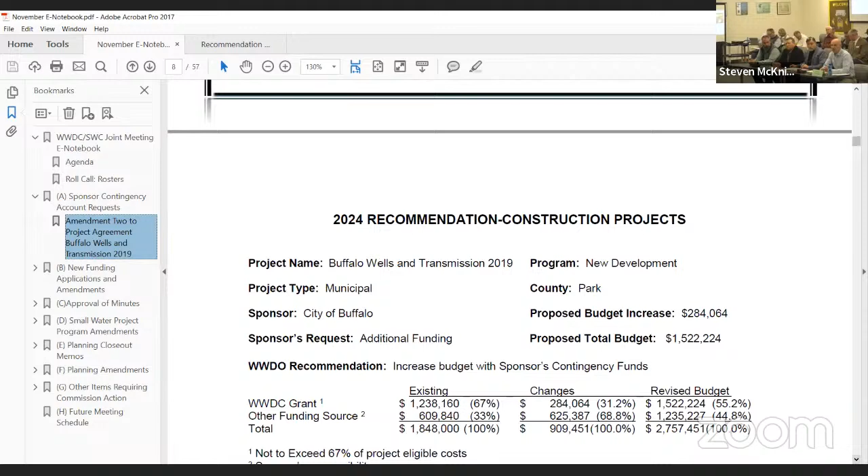I didn't anticipate there being any topics for Select Water Committee from my first contact with the LSO. So we decided we were going to shove everything into one day, because last year we had a short Wednesday and were hoping we could move some stuff to Thursday, but sponsors weren't there. So anyway, might be a little bit of a long day tomorrow, depends how many questions everybody has. And then Thursday, Select Water Committee is going to meet first thing in the morning.

And then I'll talk a little bit about the thought process we went through for the recommendations you're going to hear tomorrow, and then give you guys a couple of updates for the GID tunnels and the LaPrelle Dam situation and the reconstruction project as well. So with that, I will turn it over to Bill Brewer, and he'll go through the sponsor contingency account request.

Chairman, Commissioners, Bill Brewer, Deputy Director of Construction. We have a project for sponsors contingency. This is a 2019 project. I've gone through several times about these 2019, 2020 projects that are still coming up. Had quite a bit of issues with COVID inflation. Honestly, this project didn't come in that bad compared to some, but definitely over. Original project budget was a little over 1.8 million.

Bids came in a little high. We're actually looking now at about a 50% increase. Like I said, with these projects that had budgets before COVID, probably between 20 and 80%, most of them in that 40 to 60 range over.

This is a backup well system, so it's a good project to move forward. The town and engineer have been very good to work with as far as looking at cost savings options, adjusting things, so we appreciate that. But basically, this is what the sponsor is requesting. This project has already been awarded. They are going to cover the cost one way or the other out of their own reserves. However, they would appreciate if we could help them with some of that so they don't empty out the reserves to get this project done.

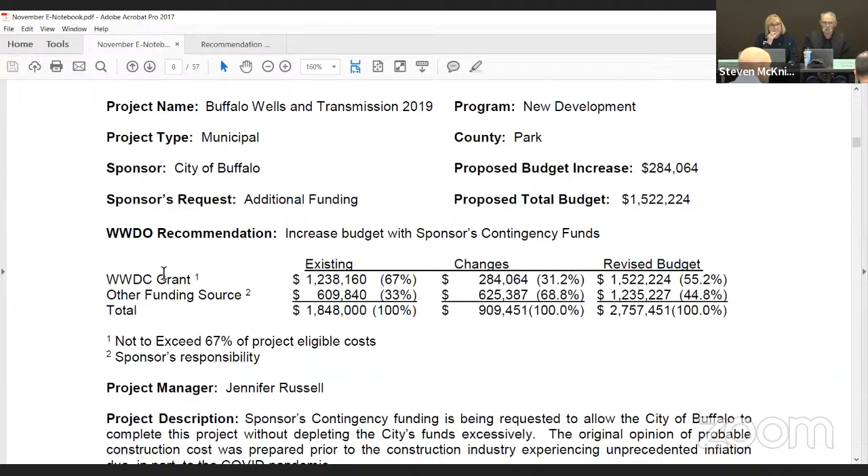Chairman, Commissioner, so for the city of Buffalo, when we did the engineer's estimate for this second construction package, it was estimated there might be up to a $1.2 million shortfall. So the city of Buffalo authorized out of their contingency funds, those funds available to complete this project so it gets finished regardless. The funds would not revert back to the Water Development Commission, but would make their contingency funds a little more whole than what they are now, because the funds are obligated to this project.

Thank you. Okay, there's no other questions. If there's anything else, I guess there's no action today. It'll be tomorrow that we take the action. So thank you. Thank you.

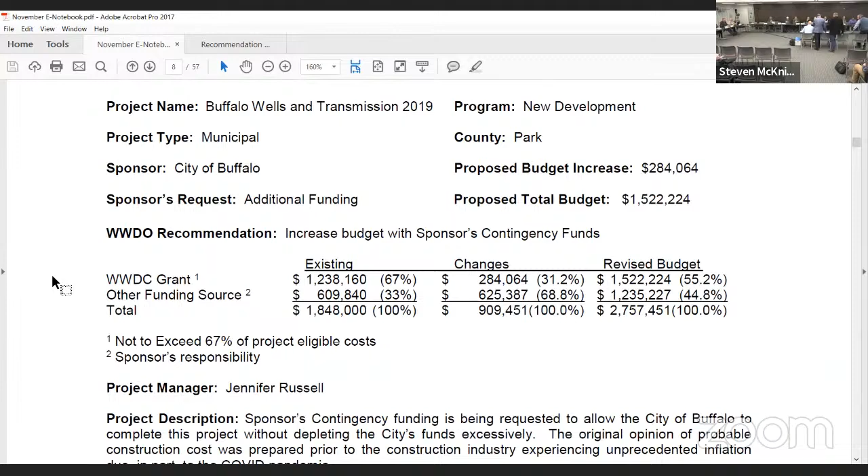Okay, we'll go back to you, Director Mead, unless you want to add something.

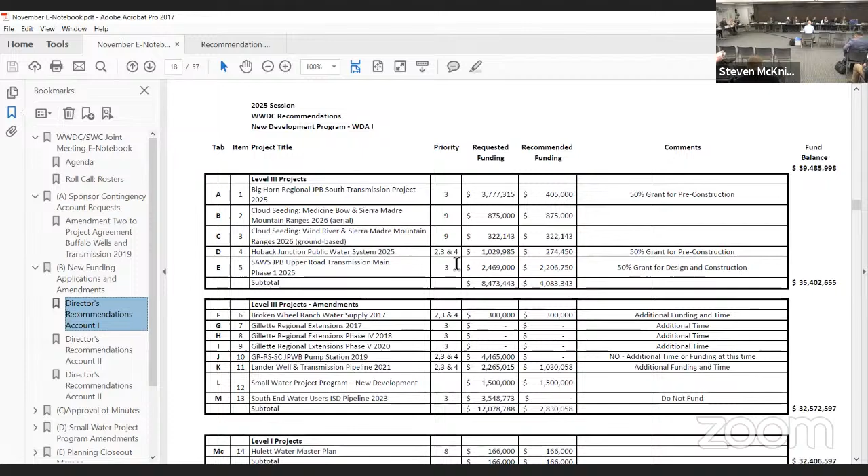Okay, so moving on to the next item, new funding applications and amendments. Again, just kind of wanting to give you guys the thought process we went through. I would direct you towards your regular e-notebook, not the recommendations e-notebook, but tab B as in boy under the regular e-notebook. There you'll see basically the spreadsheets and recommendations and dollar totals and funding balance for different accounts 1, 2, and 3. I'll be talking through those a little bit, but it'd be a good reference as I talk through this. So I'll give you just a minute to find that.

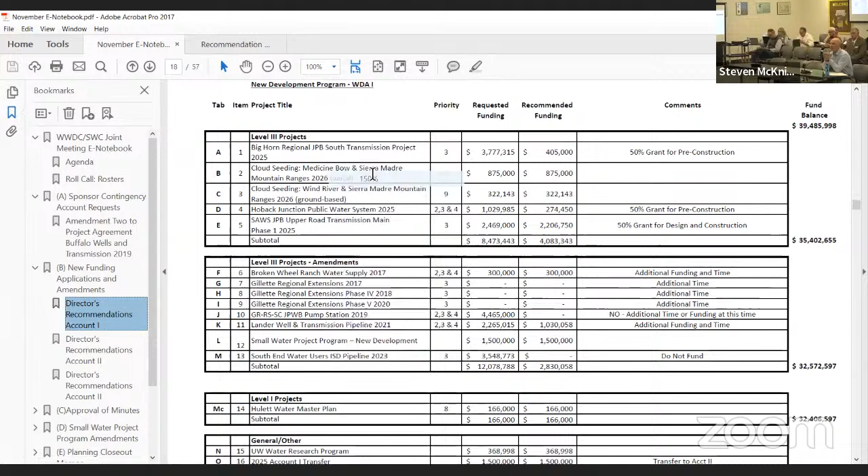Everyone's set? Okay, go ahead. Give it one minute. Okay.

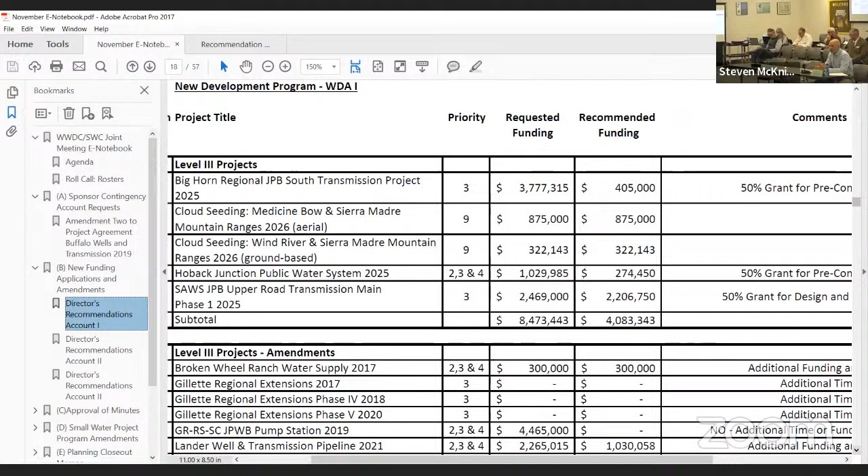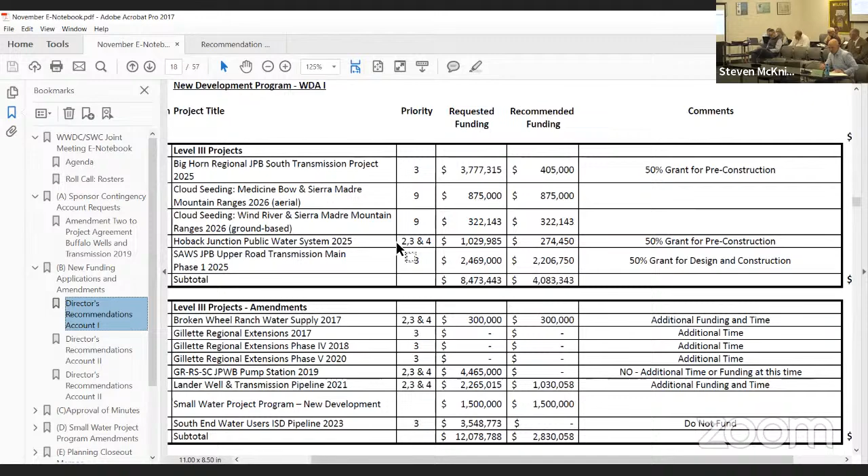Okay, go ahead. All right, so I'm going to talk about account one and account two together simultaneously, because as you recall in the past, we've transferred money from account one to account two to kind of budget or balance things as we have more demands in one account or the other. So when you look at account one balance available to spend, that's up in the upper right-hand corner of each one of these spreadsheets. So the first spreadsheet's account one, the second spreadsheet's account two, and so on for account three. So the amount of available funding this year is roughly $56 to $57 million.

And that's broken up into roughly $39.5 million in account one and $17 million in account two. As a comparison to last year, at the end of our recommendations for the 2024 session, we had roughly a little less than $13 million in account one and about $5.6 million in account two. That was kind of what we typically do: we take our biennium available funds and try to spend half one year and leave half for the next year. So that half we had left over was about $12.8 and $5.6 million. So then what happened, these balances are much bigger.

So we talked in March, I believe, from what came out of the legislative session. One of the things was a one-time refund for the Board of Control funding coming out of our account one. Board of Control is all the hydrographers and folks regulating head gates throughout the state during the irrigation season and others. That biennium refund for 2 years was about $17 million.

The other thing was, if you recall, we had ARPA replacement. What came out of the legislative session was that the governor was given authority to redistribute some of the ARPA funds that weren't used, water being one of the emphases put on by the legislature on where to put that money. So we worked with the governor's office, came up with 8 projects that we felt would meet the time requirements of ARPA and getting money obligated and spent by those certain dates with federal requirements. Those 8 projects equated to about another $23.5 million, where they replaced water development funds that had been given or granted to our sponsors. So now instead of the sponsors having water development funds, they have ARPA money. Our accounts were more or less replenished for $23.5 million.

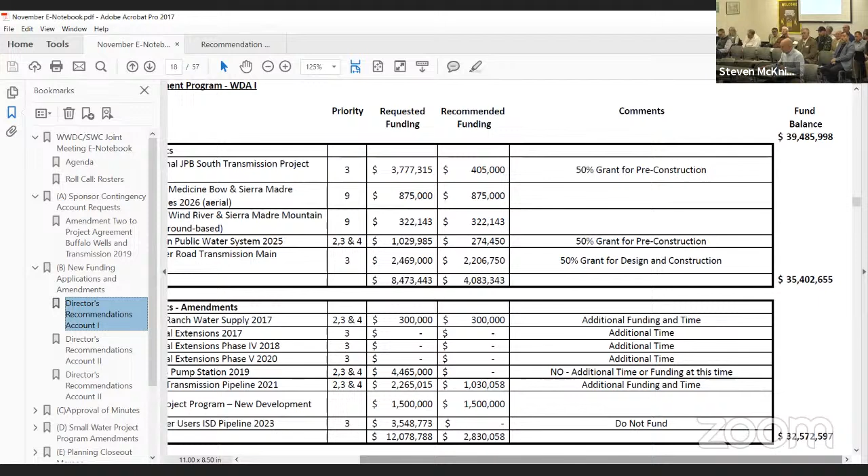For applications in account one, we got 19 new applications - that was between account one and account two. We have 10 amendments that came in by September 1st for construction projects. We already knew what our planning studies were going to look like since we took applications back in March and went through our May meeting to select those. Adding up the different construction projects, we had about $47.5 million worth of new applications for new construction projects and about $10.5 million of amendments to existing construction projects.

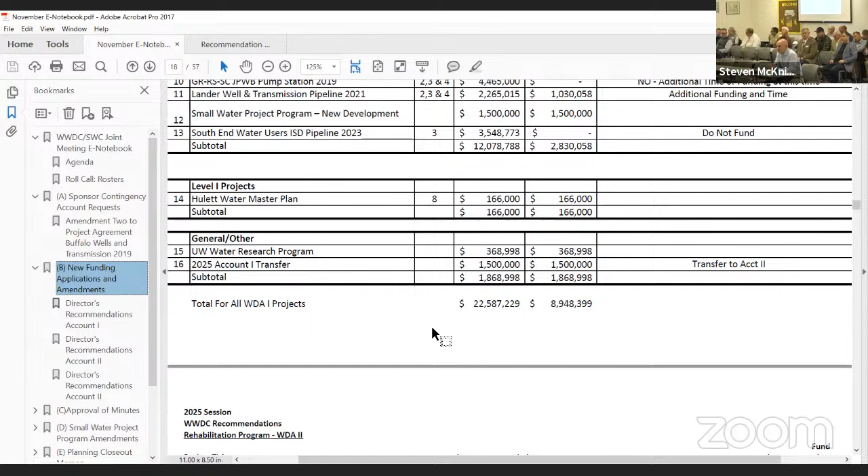As a comparison, last year we had roughly $46 million worth of requests between new and amendments. So again, more than we saw last year.

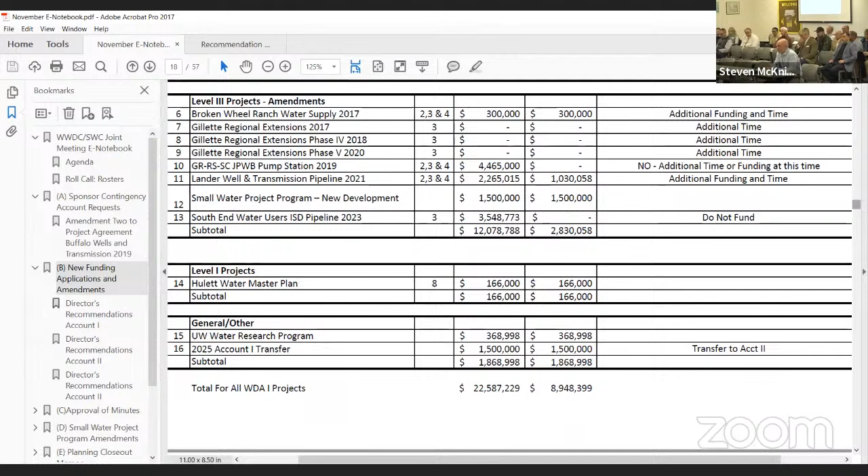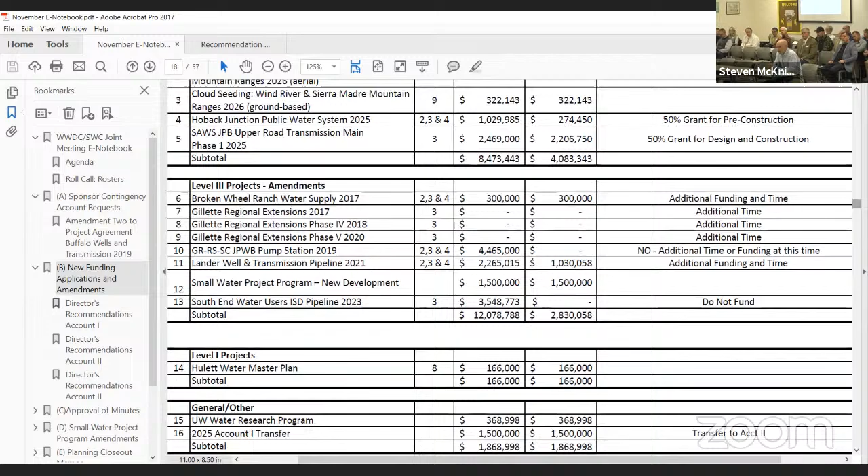The way we look through that is, one, is the project even eligible for our program? One project this year you'll be seeing tomorrow - West Afton, Neeld String - they were two irrigation groups working together, got a master plan done, hoping they could put together a district. I think Neeld String kind of fell out of that conversation - we'll hear more about that tomorrow. They only came up with 933 acres, if I remember right, and our criteria says you have to have a minimum of 1,000 acres to be eligible for the water development program. That's one thing we considered, and that'll be something the commission and the Select Water Committee will have to consider tomorrow for that particular sponsor.

The other eligibility component is, a lot of times when we get projects in, they're a much larger project that might include water treatment or water distribution lines for municipal type projects, where our program really just funds the water source and transmission lines, not necessarily distribution or water treatment plants and things like that.

So we have to ferret out what portions of a project are actually eligible for our program and which ones aren't, and then we tailor our recommendations accordingly.

Another thing we thought about is this is one-time funding. There were several sponsors that asked for multiple projects or multiple projects within one application. We want to make sure we're distributing that funding as evenly as we can, or giving sponsors the ability to leverage it if they can. Just because you happen to apply for several projects in one year, we didn't think it was necessarily fair to give that funding to just one sponsor. We should hold some over for next year, and that was part of our thought process as well.

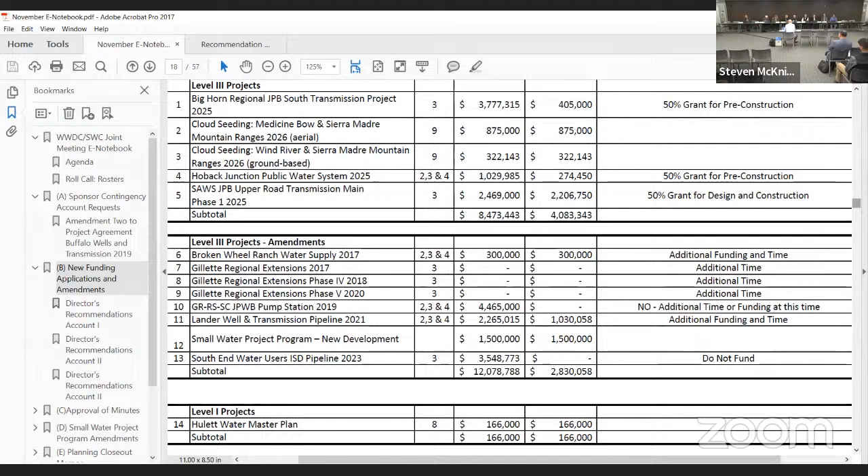Madam Chair, Vice Chair, Director Mead - I don't know if it's appropriate or not. Is this the place to discuss individual projects, or should we wait till tomorrow? I'd prefer to wait till tomorrow since the sponsors are here to address questions, unless you've got something fairly simple. Well, this wouldn't be a question for the sponsor, it'd be more of a question for you. Okay, and maybe for the group.

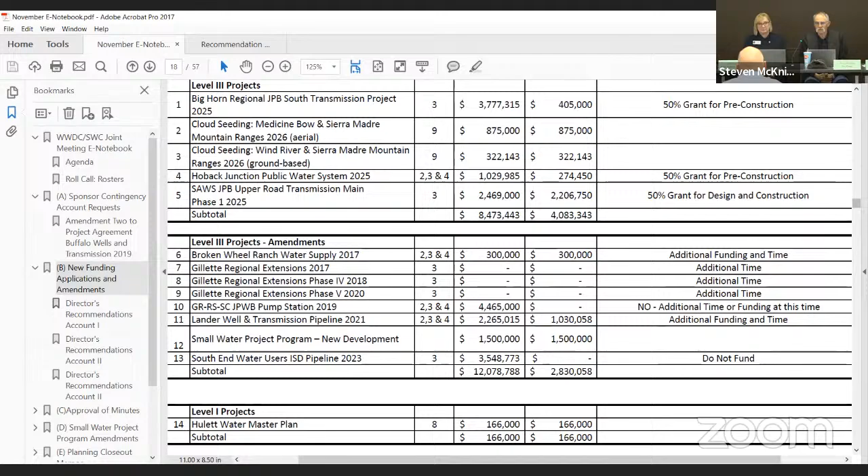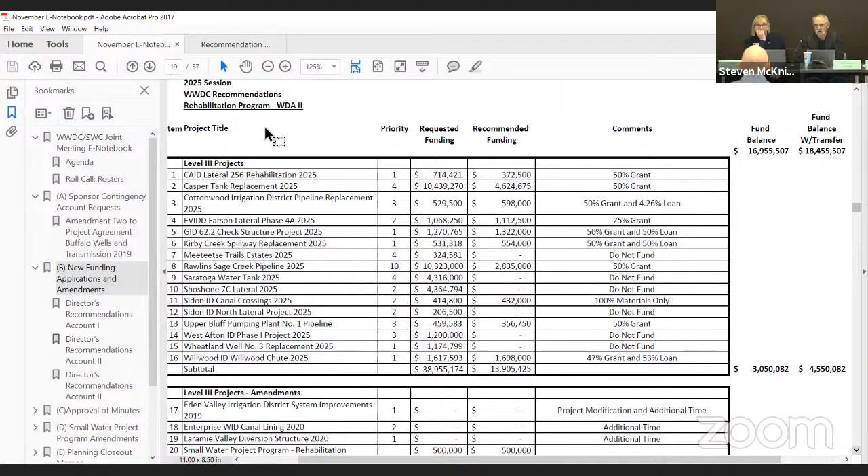I became aware of this West Afton Neil String acreage limitation - a 1,000-acre limitation, I believe. I did a little research into that and found the language on it. The question I have is, is that part of the working criteria? How concrete is that? Has there ever been an opportunity for a variance to anything like that?

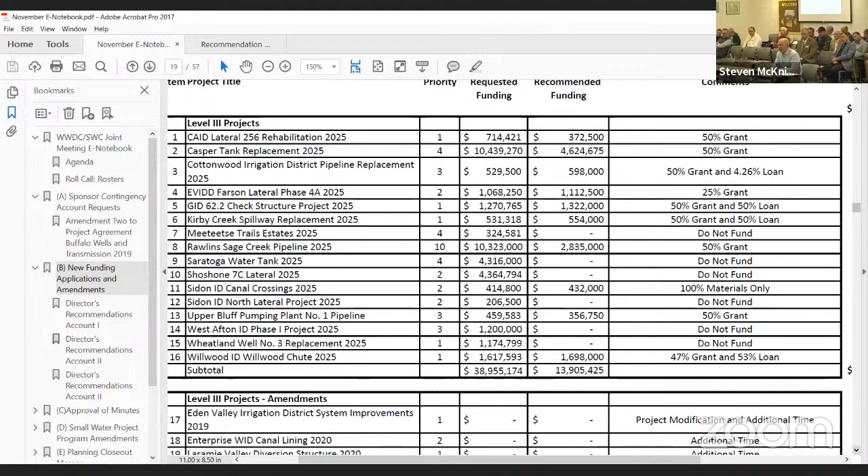So it's in our operating criteria. Criteria are not rules - they're there to help guide our program. There can be exceptions to criteria, and that's up to the commission to consider. I don't recall if we've ever had another sponsor come in under 1,000. At one point, I think it was 2,000 acres under a previous commission, probably a decade ago, and they decided to change it to 1,000. I don't know if there was any real firm thought behind how they came up with 1,000, but it was changed at one point in time. I'd say there are always exceptions to the rules, but we also have to consider the funding we have and all that.

I guess that's what I can respond with on that question. Okay, thank you Director - but you have the flexibility to do what you want. Okay, great, thanks Director. And then we'll go ahead and let you continue.

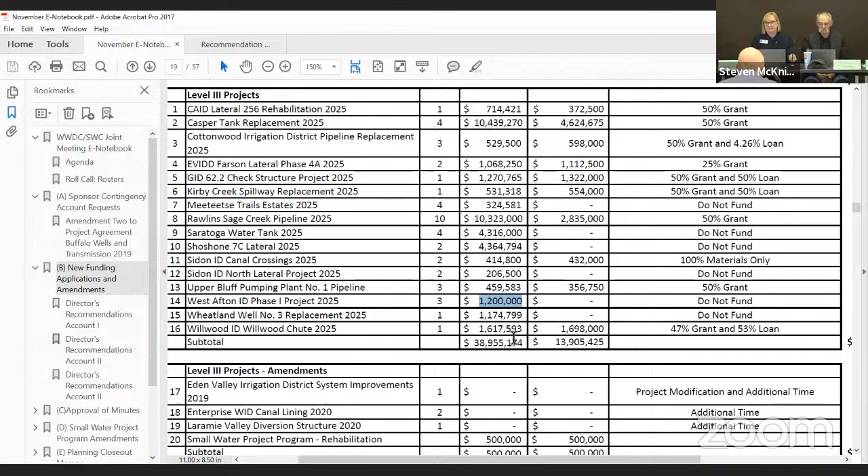The only other thing I'd mention, a little separate from what we were just talking about - normally when we finish planning studies, we do project closeouts showing how much money was spent, a synopsis of the study, and when the final presentation was. We had a number of studies: Casper Alcova Irrigation District Master Plan, Goshen Irrigation District Master Plan, Sidon Irrigation District Master Plan, and the Willwood Rehab Level 2 study. Those are just getting wrapped up - we're still waiting for final deliverables and final invoices. It'll be slightly out of order because they've already applied for level 3 funding, and you'll hear those tomorrow.

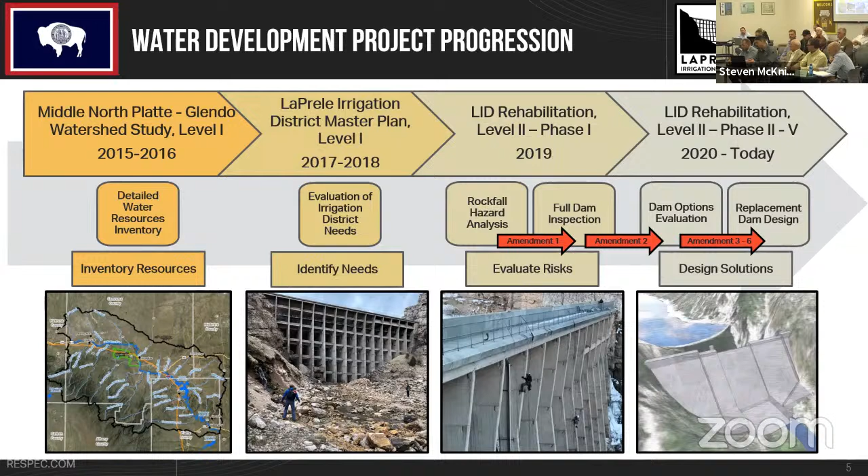Then into 2023, we amended the contract again to move towards 30% design. That's when we tapped into the federal money in May of 23. From May 23 through 24, there was additional geotechnical analysis, additional helicopter drilling, and that leads to a little more detail on what's happened in the last year.

Completing that 30% design included updating the spillway design, structural analysis and modeling, updating the construction cost estimate and basis of design report. The cost estimate at 30%, to give the range, is anywhere from 116 million to 178 million, with error bars around the estimate given where we're at on design.

We've also delivered, or are finalizing, the 2023 geologic data report, going through all the data collected from 2020 through 2023, including the fault and fold evaluation. We've been moving forward with NEPA and environmental surveys, and that's coming along. We're targeting a finding of no significant impact in the first half of next year to keep things moving.

We've been shifting from what has been a level 2 project into a level 3 project, with changes to those contracts and planning to get the CMAR integrated. We've just finalized the contracting for design, got signatures this morning actually. But really looking at the last 2 to 3 months, what we've been focused on has been the existing dam, so we'll jump into that.

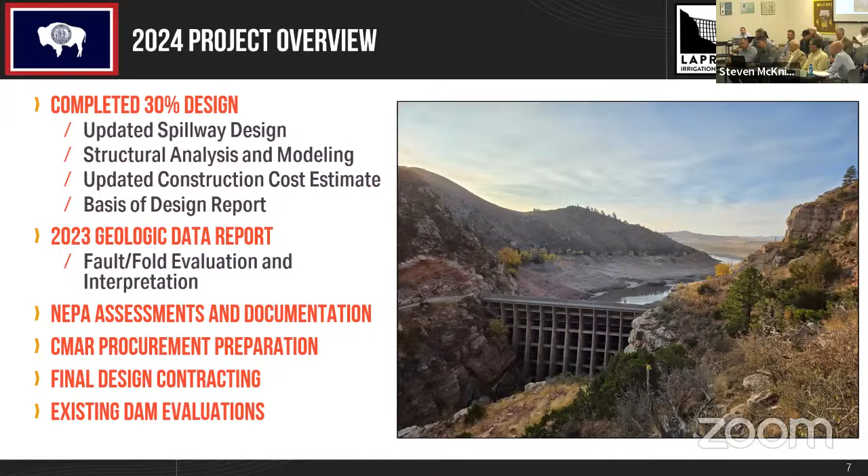Thank you, Madam Chair. I'm going to talk about what has been all consuming for us on this project for about the last 3 months, and is the topic of the day. I'll give a brief history going back to the 2022 inspections and the findings of that, to set the table for where we were at the beginning of the summer, so we can talk through where we're at today and what led to today.

As Pete just alluded to, the very first inspection was a very limited inspection of the three buttresses back in September of 2019. That's where we found the large crack on buttress 17, about a 10-foot vertical crack. That's where we put everything on hold for the feasibility study as it sat at that point. That led to the first full inspection with the rope access team and a drone survey of every surface of the dam.

The first full inspection was in December of 2019. Then we did a follow-up inspection as part of the state engineer's office 5-year return interval on inspections of this dam, so we repeated that process in 2022. That's what I'm showing on the screen right now.

This shows all the cracks found in each of those inspections in 2022, looking at the side of the buttresses. You have a slab and 17 buttresses, and this shows all the cracks on one figure, not any one buttress, but all of them composited together. Going back to that first 2019 inspection, we were hoping it was an isolated issue with just buttress 17, so we could focus our rehabilitation there. But what you see in the 2022 figure is systematic shear cracking throughout the dam. There are numerous issues with the dam.

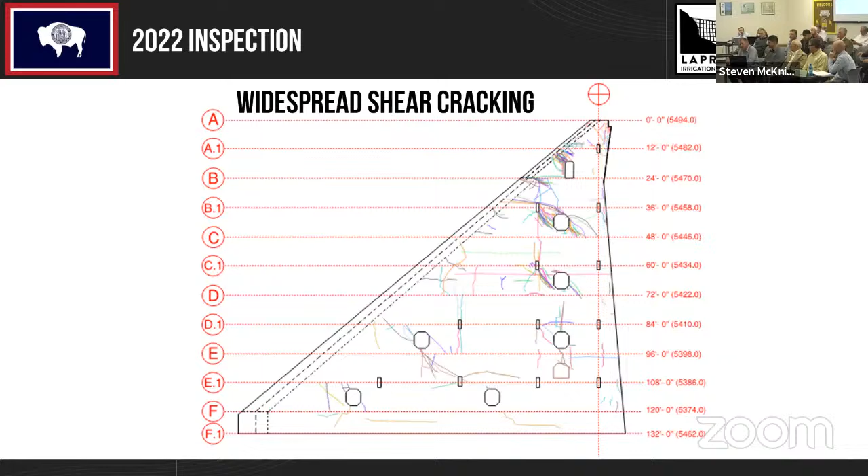Generally speaking, the outcome of that 2022 inspection, and really all the work up to that point, was that the dam has reached the end of its useful life. It's in very poor condition.

Also in 2022, we did a risk analysis. This was a process paid for using FEMA funds, led through the state engineer's office. It's a whole presentation in of itself, so I promise I will not cover it fully.

Just two slides. The outcome of this is we looked at a lot of different failure modes in this risk analysis, plotted multiple failure modes. Anything above those dotted lines on the screen is unacceptable, above the tolerable risk thresholds. The total risk is plotted there in the white box.

The outcome of this is that the total risk associated with this dam is above tolerable levels. I should point out that this assessment only evaluates the potential for loss of life. It does not incorporate infrastructure into the allowable or tolerable risks. A catastrophic failure of this dam would have incredible impacts to downstream infrastructure besides the potential loss of life, including potentially taking out the two interstate bridges.

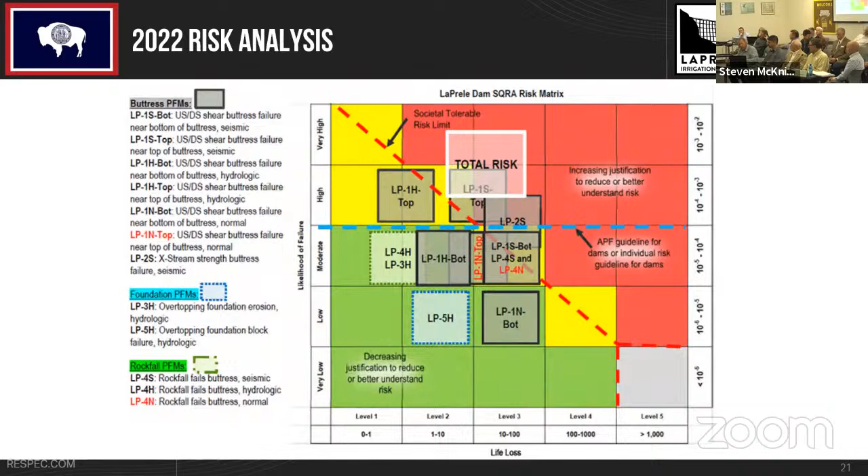So really all of this work led to where we were at the beginning of the summer. It held true: the overall condition of the dam is poor. That risk assessment was focused on the risk at the restricted level, not at full pool at 54-90. And even at 54-75 with the restriction in place, the risk associated with this structure exceeded the tolerable risk limits. Interim risk reduction measures would be justified to help mitigate this risk.

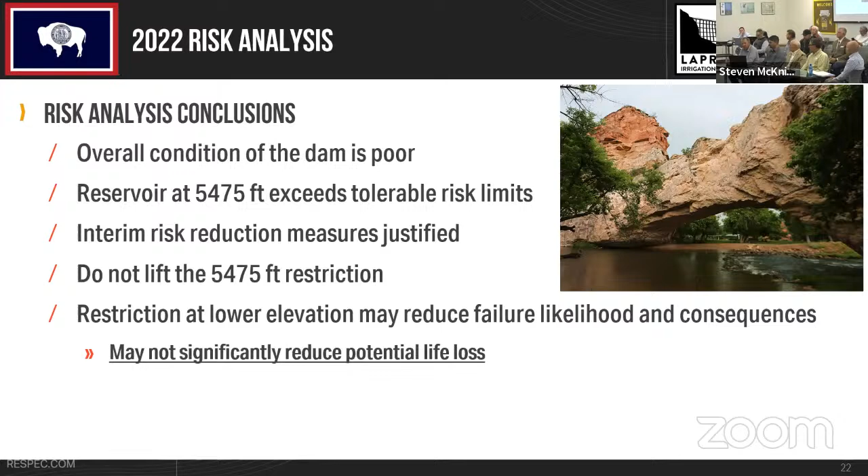It reinforced the idea that you could not remove this risk; the restricted level of 54-75 needed to stay in place at a minimum. Ultimately, while restricting to lower elevations may reduce the overall likelihood and consequence of the dam failing, it doesn't really reduce the total risk below those dotted lines, because the hydrologic risk—the chance of filling up in any given year—is high enough that you're not significantly reducing the potential loss of life at lower level restrictions, and it would still be above the tolerable risk limits.

So that's between what Pete talked about and what I talked about. That took us all the way to the beginning of 2024, and then things started to change. Kick it back to Pete.

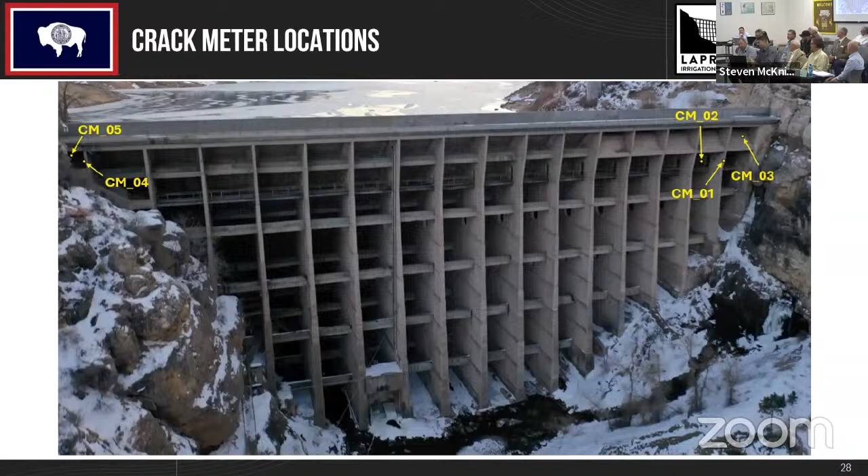All right, on the crack meter location slide. Yep. Thanks, Corey.

The thorough inspection we did in 2019—at that time we knew we had cracks and wanted to install monitoring on them. The irrigation district actually paid to have these installed and perform monitoring. Shown on the screen is the location of the 5 crack meters that were installed, all higher up on the dam, where we had seen the most apparent cracks we were concerned about at that time.

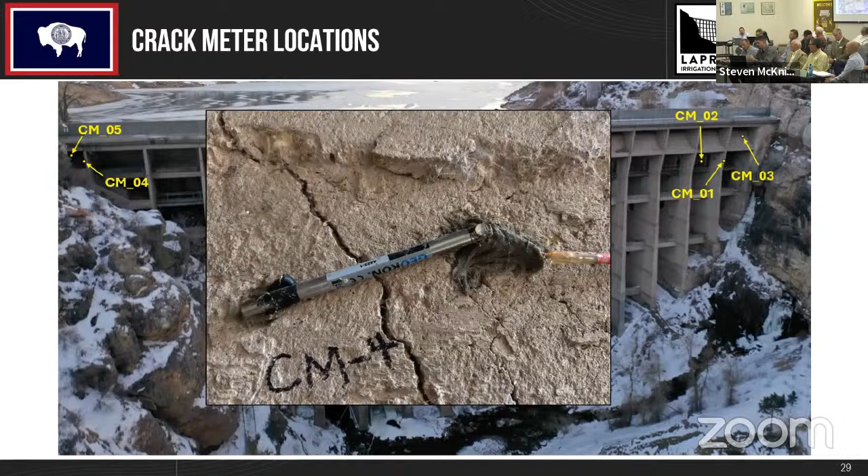We have data from that logger sent out by cell, and we get it nearly real time—I think maybe every 15 minutes on the update.

Ultimately, by the end of 2021, having a couple seasons under our belt, we didn't see any clear correlation with water level. But given that we had all the crack meters up high on the dam, we thought it'd be good to put some lower on the dam, and just to continue monitoring for any change in behavior.

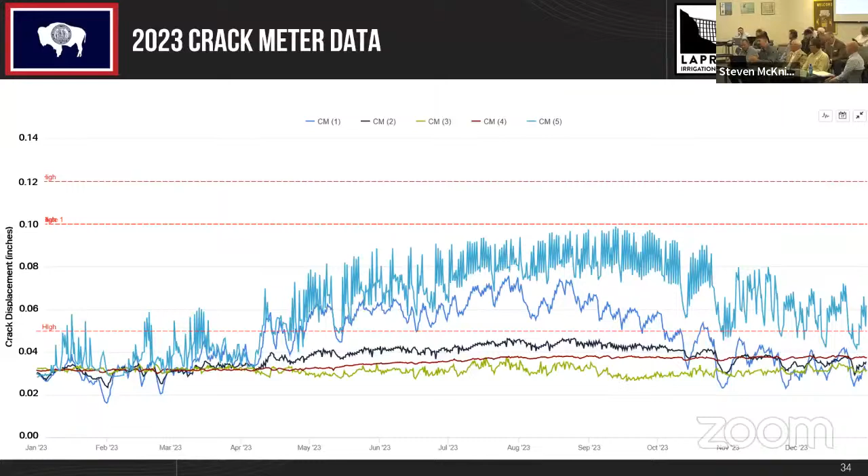At the time, the irrigation district decided not to extend the contract beyond 2021, since this was another cost for them. But I did make the decision to keep them out there collecting data because the situation seemed important enough. So just to cover these briefly, this is showing data through 2022, 2023. We're checking in occasionally, looking for anything unusual, and we set thresholds around what we had seen as normal crack movement, so that if we got any crack outside of that, we'd get an alert.

What led us to where we are today: in early August, the 1st, 2nd, and 3rd, we received alerts that crack meter 5, which had a lot of fluctuation throughout our monitoring, had exceeded the threshold we'd set. So we checked it out. It hadn't exceeded by much. We speculated that as hot as it was at the time, and the way this one correlates strongly with temperature, that may have driven it.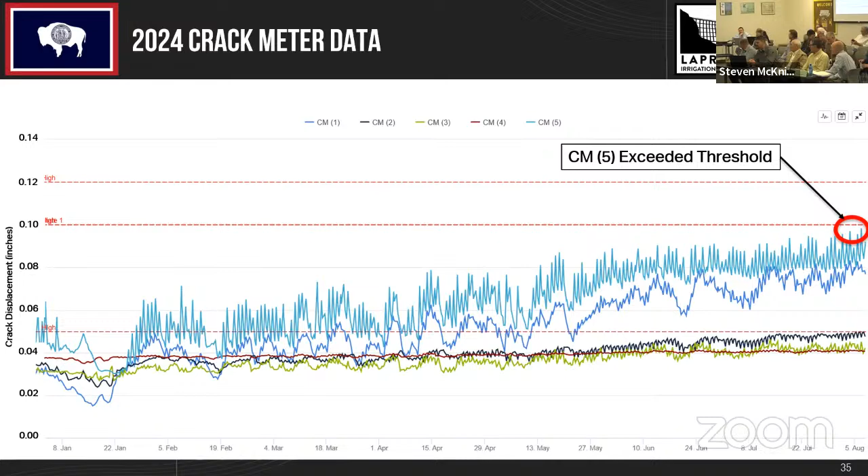Ultimately, we pulled in crack meter 5 to look closer at what we have on the screen. There's all 5 years of monitoring data - displacement up above, temperature down below. We really didn't see any significant changes in behavior, but if anything, maybe a slight trend up in the displacement over those 5 years. But really only talking about 1/100th of an inch. For scale, if you're familiar with a mechanical pencil, that lead is 2/100ths of an inch, so it's a very small change in displacement.

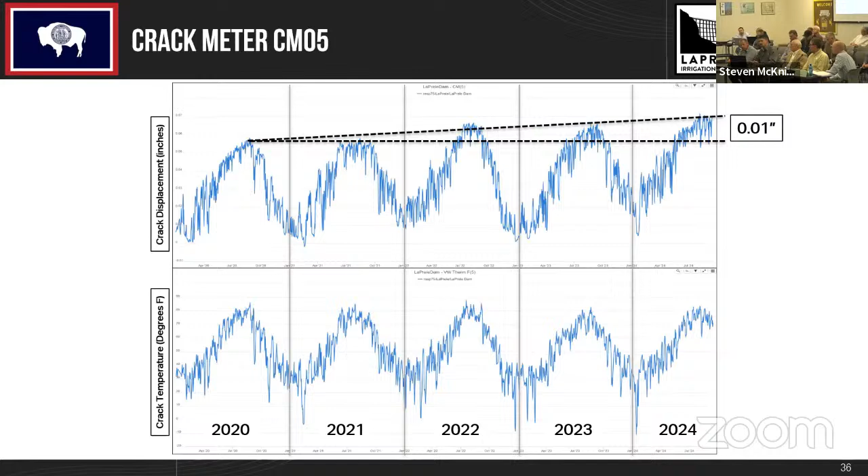We concluded that this is noteworthy. We didn't think it was concerning at the time. But this led us to take a look at the other crack meters to see if anything else unusual was going on. Crack meter 3 is one that over the 5 years really did not have much significant change in displacement compared to, say, crack meter 5.

But looking at it closely, what I have there with the dashed red line is really what we would have expected - typical behavior. As we look back, we noticed that starting in May 2023, it deviated from that expected behavior. But again, even into 2024, as that ramped up, still talking only a displacement of 1/100th of an inch in that change.

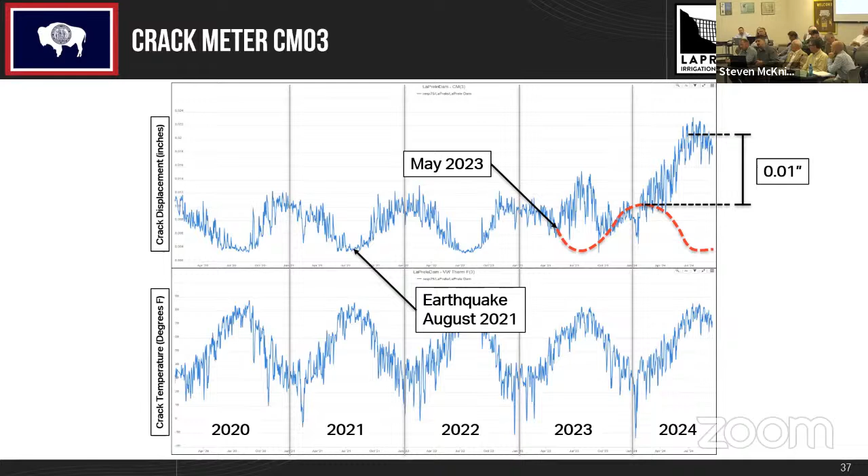Also on our minds was, okay, we're seeing these changes - does this relate at all to the earthquake? If folks remember, we had the earthquake right before the commission tour in 2021, and that really didn't seem to have anything to do with it.

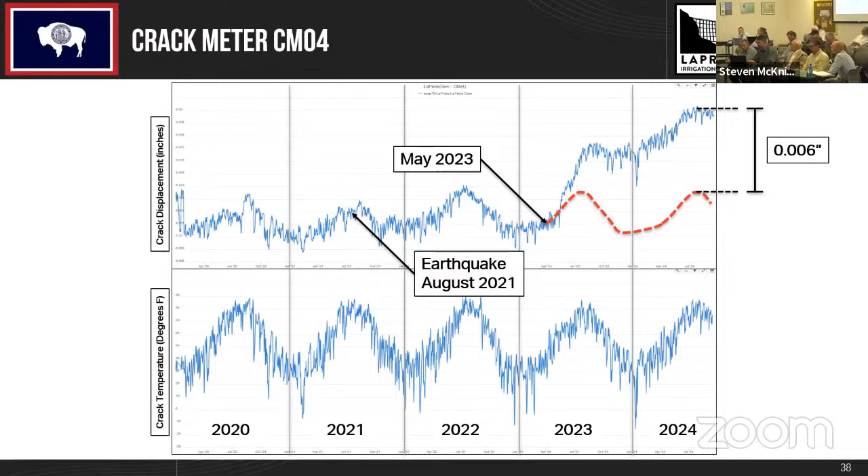Also looking at crack meter 4, we basically saw the same kind of change in behavior about the same time, but even less of a change in displacement - 6/1000ths of an inch. So evaluating, well, we've got these 2 crack meters at either end of the dam, just showing where those are at up there.

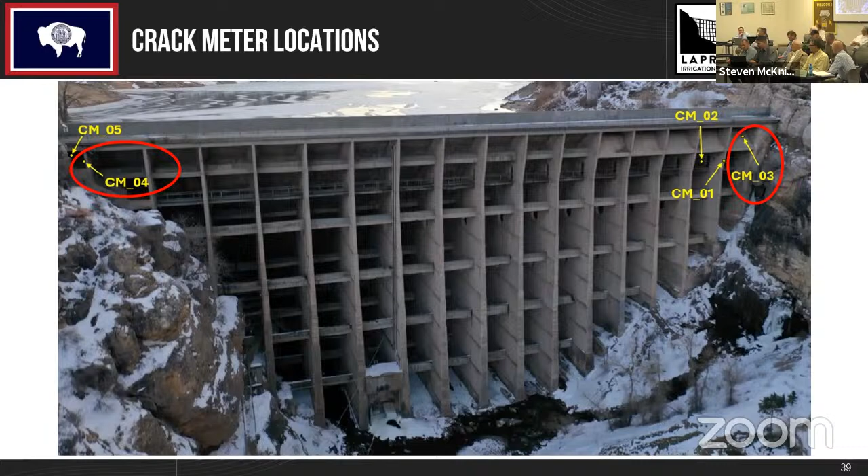It really brought forth these questions. First, we are seeing this change - what's the status of the reservoir? At that time, the irrigation district had finished irrigating, had turned off the reservoir August 6th, I believe, and the reservoir elevation was low. So that was good, and the conclusion was, okay, the reservoir's low, this isn't necessarily urgent.

But the next questions are: have these crack meters come loose? Do we really trust the data? We needed to look into that. But then with the change on the two crack meters, both starting in May of 2023, was there some significant event that may have caused that? And if so, seeing this on both ends of the dam, is there something going on in the middle of the dam?

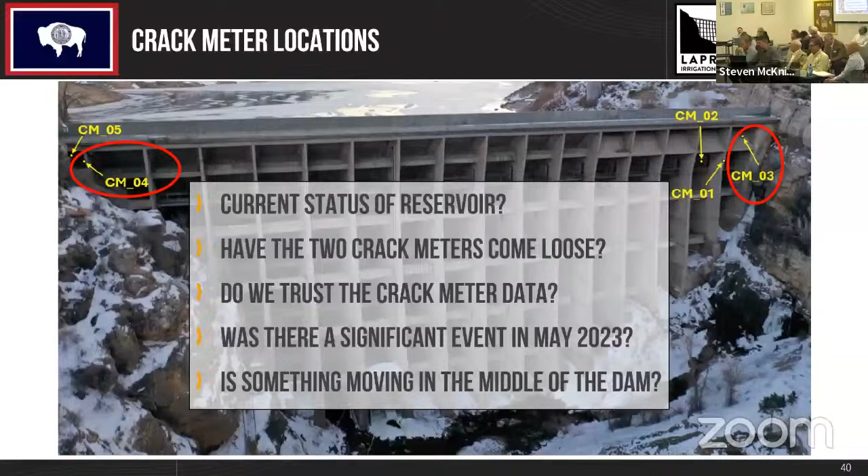So, I already touched on - the reservoir elevation was low. We got out there September 17th to inspect the crack meters and found them solid, well bonded, and determined that the system was fully functional. So that answered that question.

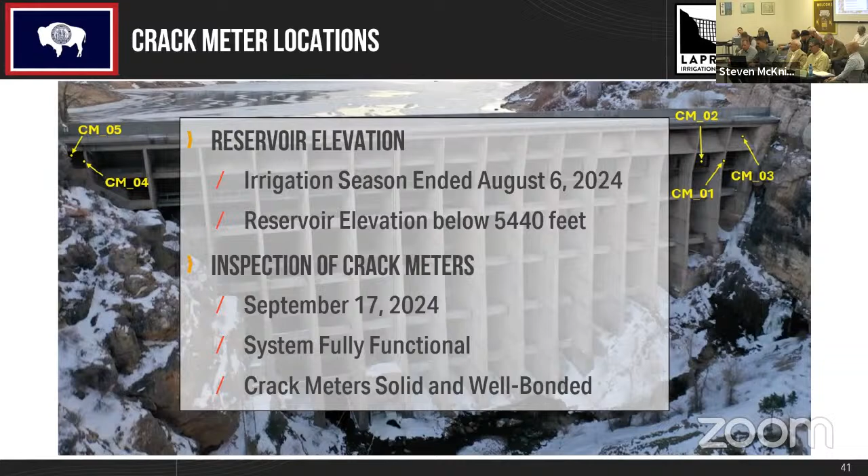But then looking at what was going on in May of 2023, the reservoir was experiencing pretty significant inflow that spring. The district was fighting that, taking turns around the clock watching what was going on with the dam. As the reservoir elevation continued to climb, the district had to open the main outlets more and more, and eventually they got to where they were wide open.

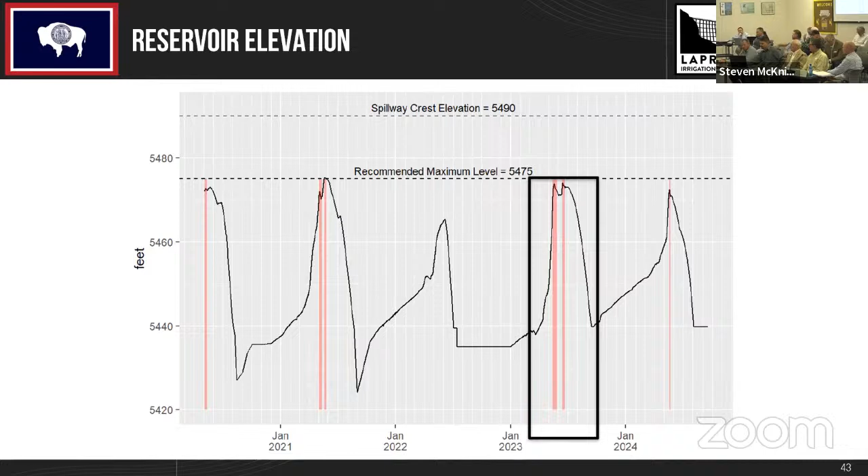As we zoom out, looking at all the crack meters over all 5 years and how things related to that May 2023 event, it's fairly apparent with both crack meter 3 and crack meter 4 that's when we started to see that change in behavior.

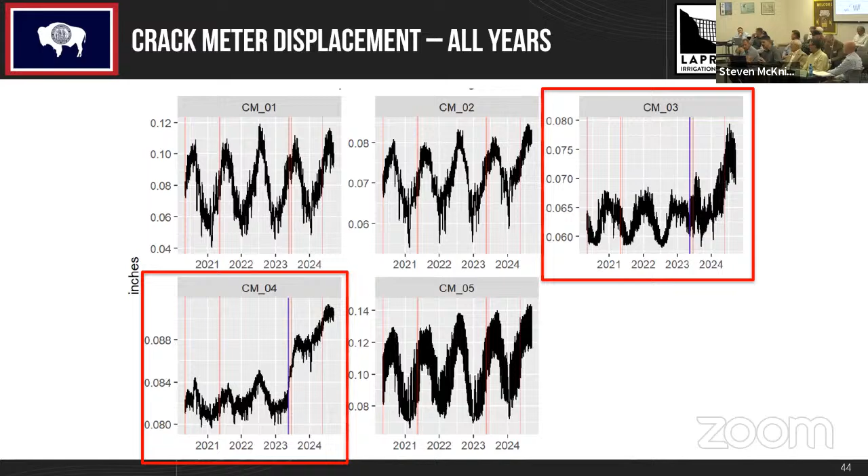Digging in a little deeper with the data to make sure we were confident in what we were seeing, we evaluated one data point to the next, tracking the difference over these 5 years. Crack meter 3 is the most apparent - the data was relatively quiet up to that moment in May 2023, and then it started to vary significantly.

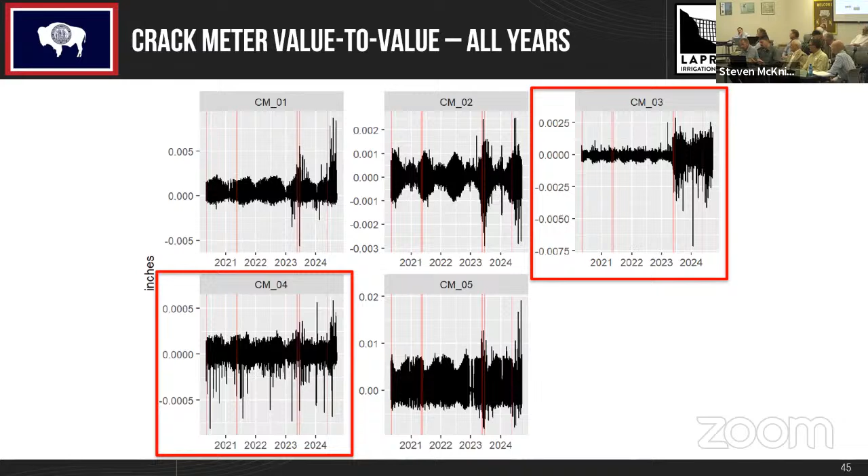We actually see that change in behavior with all the crack meters starting at that time. This is just zooming in on crack meter 3 to show, narrowing in on when the discharge was cranked up, that clear change in behavior.

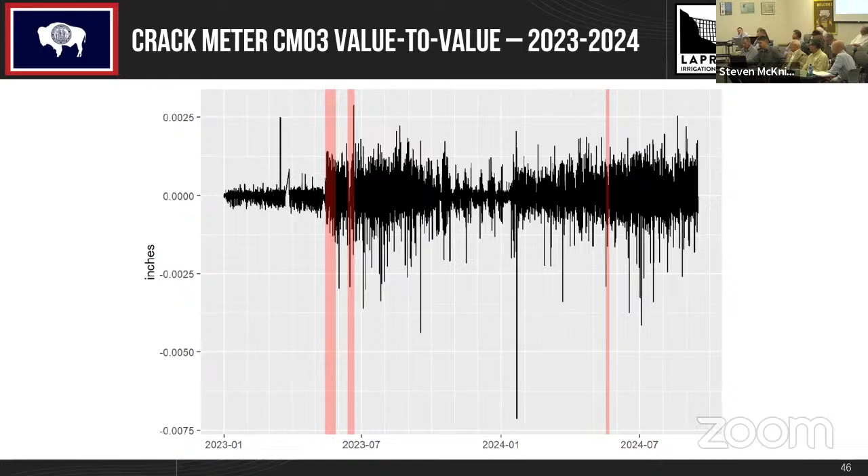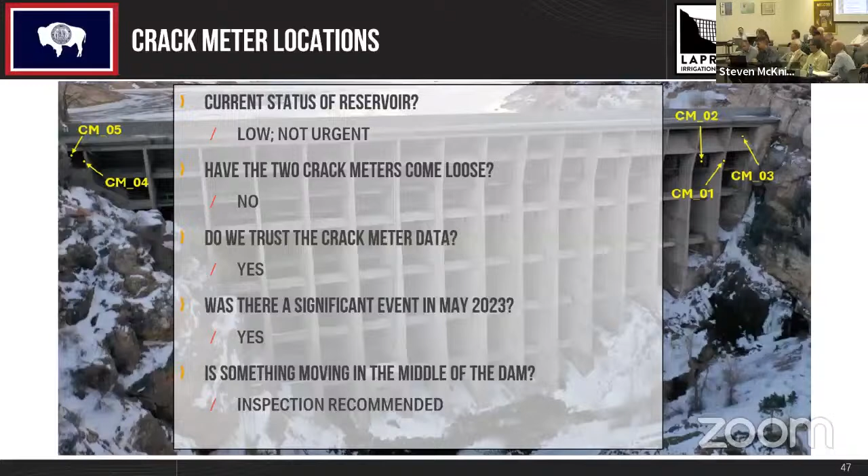So back to the questions. With the reservoir at that time, early August and now into September, the reservoir is low. We didn't think this was urgent, but the crack meters had not come loose. We trust the data. We identified there was a significant event in May of 2023, but the last question being: is there something moving in the middle of the dam? We recommended an inspection and worked with the HDR structural team to set that up.

Okay, so I'm going to talk a little bit about the inspection. Just to recap, we have movement in the top 2 corners of the dam. We don't know what was happening in the middle of the dam at this time, so we're not really seeing the cause of the movement per se - what we're seeing is a symptom, and we don't know what's happening in the middle. So through multiple conversations with the state engineer's office, LID and others, the decision was made to move forward with a full inspection.

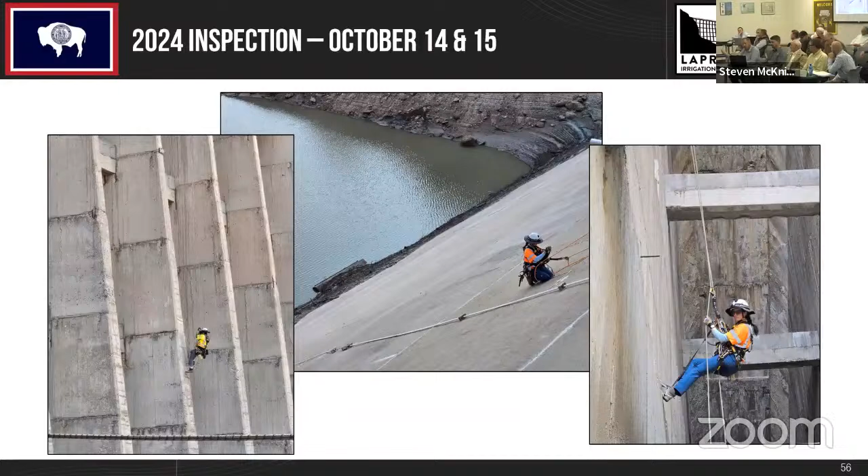Again, following the procedure I already talked about in 2019 and 2022, we had a rope access team out there, as shown in this slide, doing the ends of the buttress, looking at those visually, and as much as they could of the side of the buttresses. You can only get so far inside the dam on ropes, shown there on the right. And then we looked at the slab of the dam as well, coupled with a drone flight to look at every interior surface.

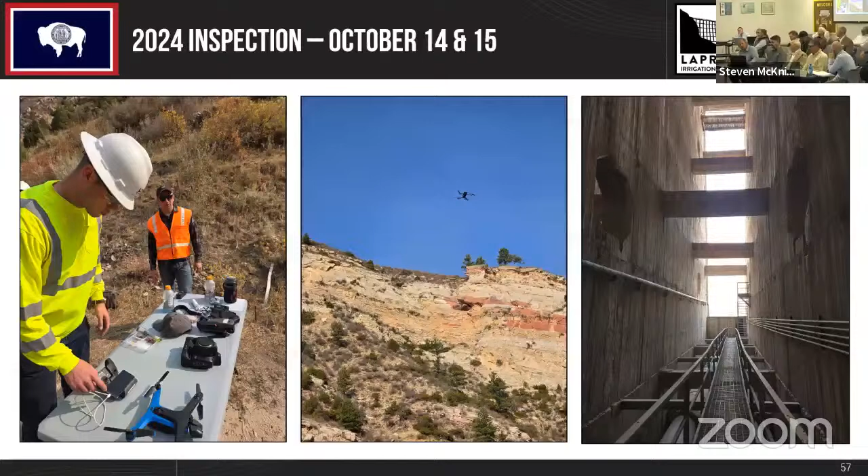We have not fully processed all of the video data yet. We are still in the process of writing the full inspection report, but we found a couple of things that we brought to the attention of others almost immediately. The first one to talk about is the crack on the slab of the dam.

And just as a reminder, this dam was constructed between 1906 and 1909, but there was a significant rehab done in the 70s, which included adding a new slab on top of the original slab. So you still have that 1909 concrete on the original slab, and the new slab on top of it, which is now 50 years old. But relatively every inspection we've done to date, that newer concrete, the top slab, is in relatively good condition - we didn't find any issues previously.

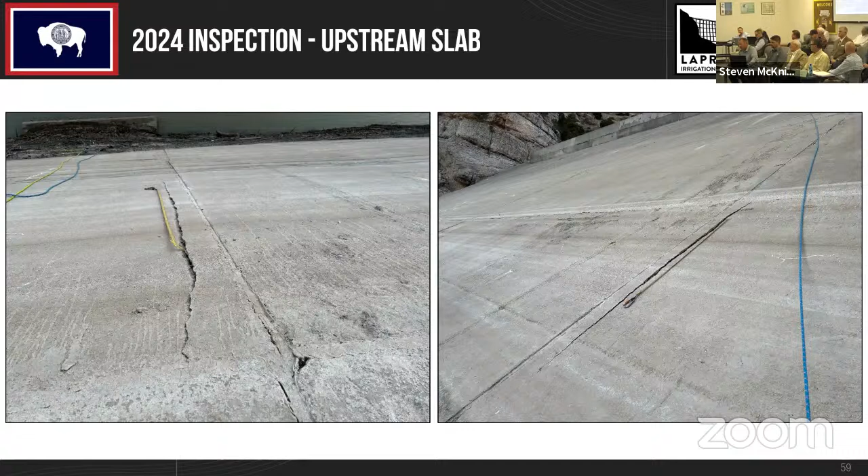Just to zoom in, you can't really see it in that first photo, but this was a significant crack. It's about an inch wide at places. There's about an inch of vertical offset. You can really see it on these photos. This is a very significant crack.

We've hypothesized, we haven't really done a whole lot of structural analysis, but we have a hypothesis of what's happening. Again, this is similar to the cracks though. This is not the cause. This is another symptom. Something is happening within the center of that dam that caused this.

The crack is kind of where my fingers come together and you have a buttress on each end, you have a buttress in the middle. Either buttress 7 has buckled down, putting downward pressure on that, or what we think is more likely is that buttress 9, which I'm going to talk about here in a minute, the buttress on the other side of the crack, has actually buckled. It's a reverse moment on that slab, and it's pulling that concrete up. Something has shifted and pulled that concrete to form this crack.

So this is not an insignificant finding. This is a major crack. We did not notice anything on the underside of the dam during the summer. There was no water gushing through the dam that was not previously noted. Remember, we do still have that 1909 concrete underneath, and that's why we believe we didn't see anything. The upper slab is separating from the lower slab.

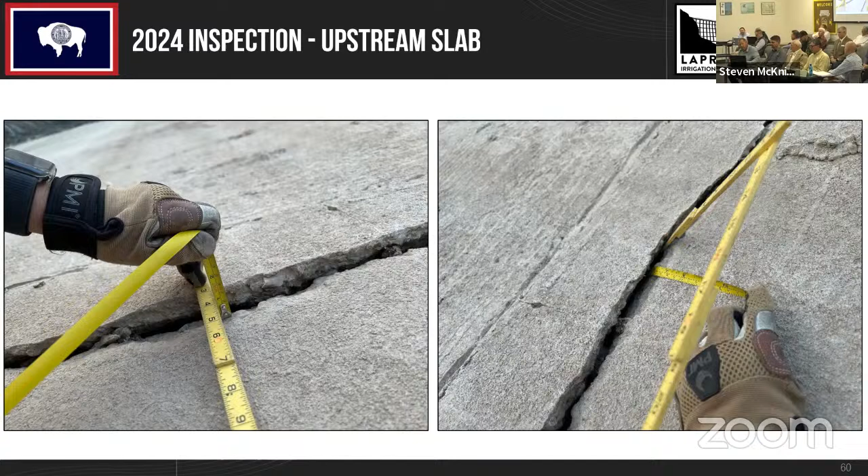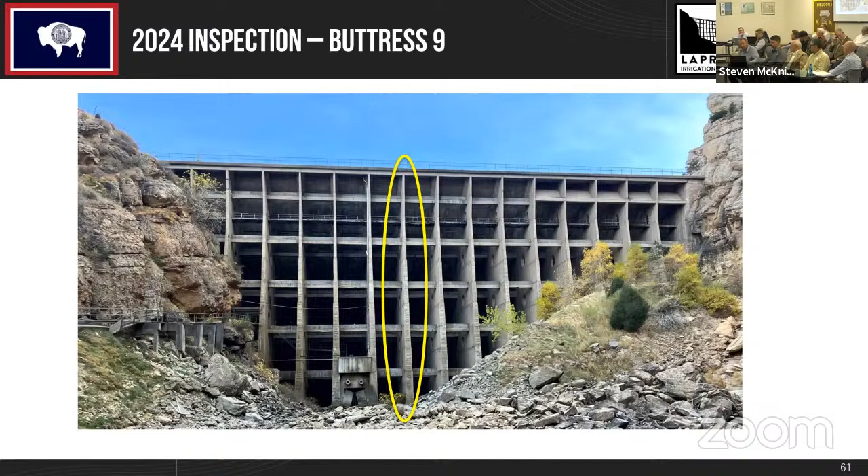So I already mentioned buttress 9, the hypothesis, and this was really, as they were looking at it, they were hypothesizing that it was lifting the concrete up. While we were out there, we also took a close look at buttress 9. I'm going to jump in and show you a couple of photos.

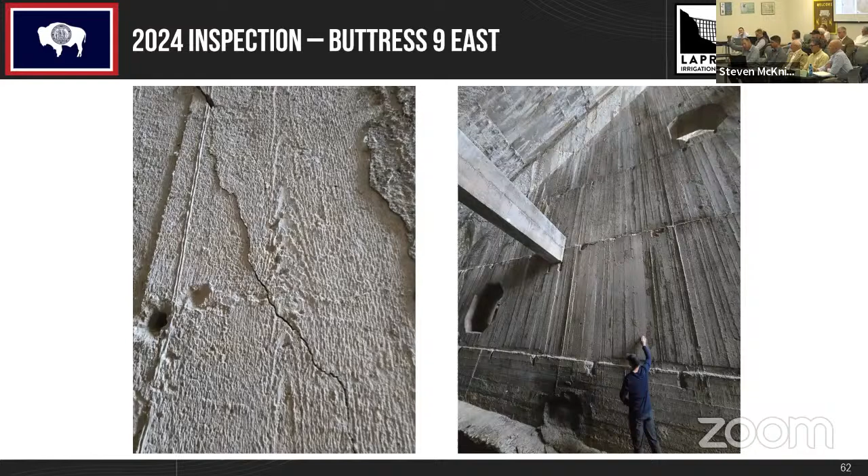We did find new cracks on both sides of buttress 9, showing a zoomed in look here on the left. There's the upstream side of the slab. Again, this is much lower than what we talked about, so this is well inside the dam. This crack goes, as shown here, all the way from the top of the slab all the way down to the foundation.

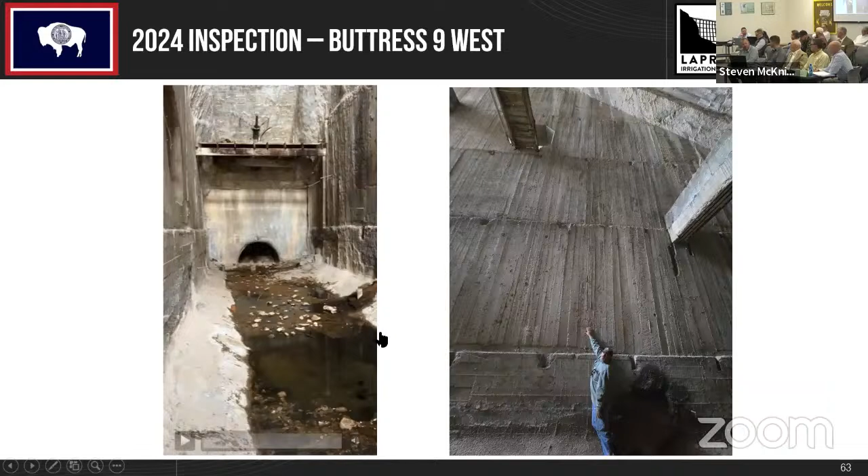And if we go one more slide, it's on both sides. So this is new, and this is another significant finding consistent with what is going on in the middle of the dam. This buttress is shifting. It's in an active failure mode now.

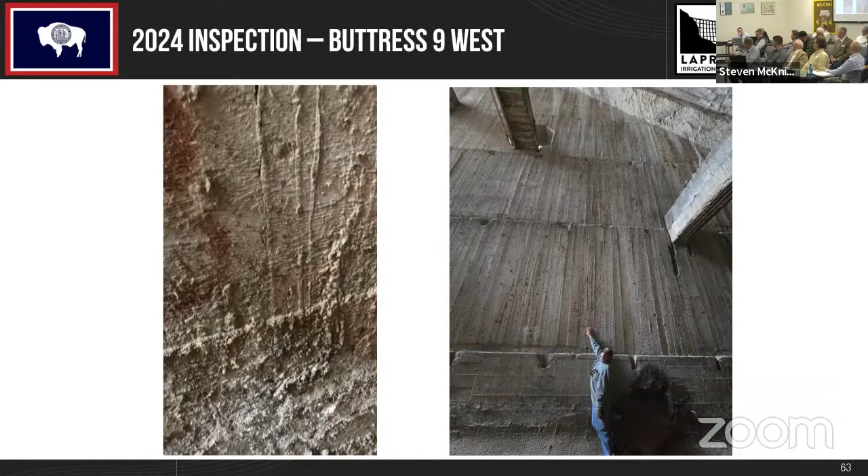We're showing the video there, which gives you a little bit better look. I know it's a small screen, but maybe you can see it back in there. Let me just watch the video for a second. There you can see the crack right there as we trace it up. You can visually, standing on the bottom, looking all the way towards the top, see it from the ground level. This is not an insignificant crack by any means.

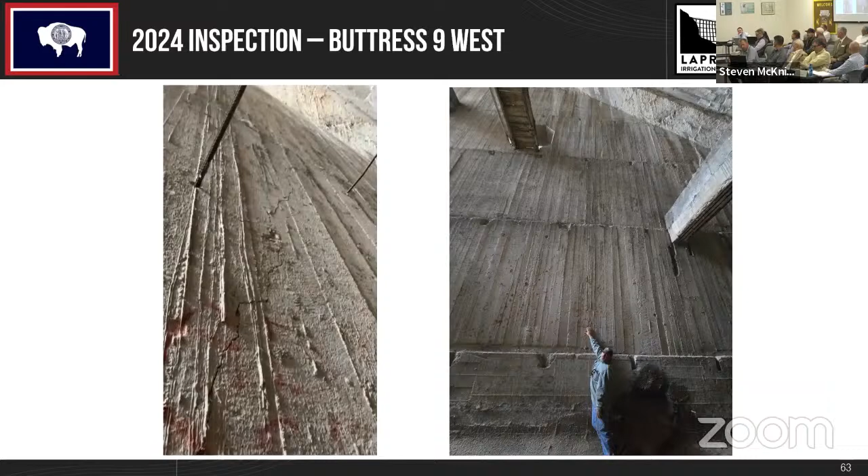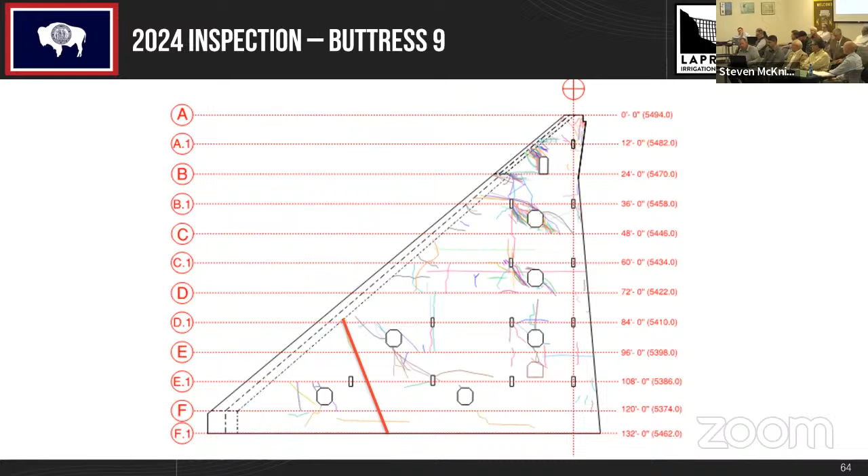So both of these two new findings were our worst fears realized. When we found the crack data, it was concerning, not alarming. We changed that statement after finding these two cracks. We changed it from no longer concerning to clearly an alarming situation.

The conclusion, after talking to many of our structural engineers, the SEO, and others, and LID obviously, it was determined that really at this point in time, based on that failing crack within buttress 9, the dam is unsafe to store any water at any level.

So that's where we're at today. That's where we were at after the inspection. A lot of work has happened since the inspection. There have been a lot of conversations and a lot of analysis, and Pete's going to talk about that.

Given that finding and looking at where we are in October of 2024, the dam itself, as I mentioned, even if we would take water up to the restriction elevation, has a maximum discharge capacity of 350 cubic feet per second, which is dramatically undersized from what we find ourselves needing to do, which is store no water, meaning inflow to the reservoir typically regularly exceeds 350 CFS.

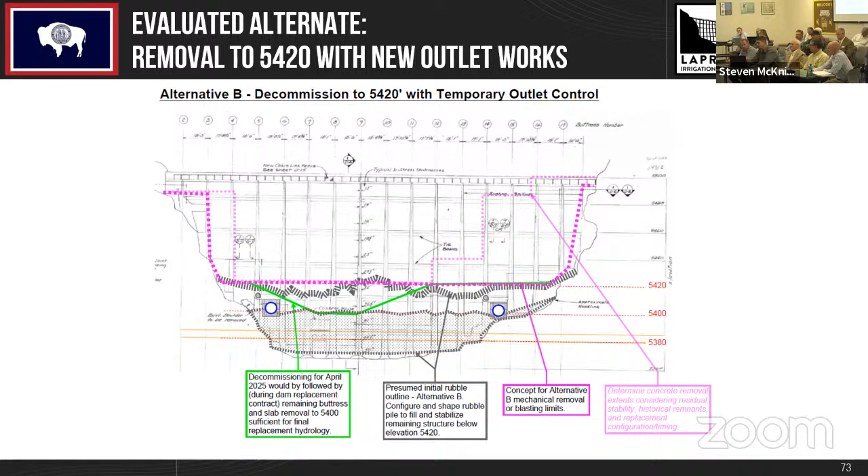That being a little bit uncertain, we asked ourselves, well, what would a failure at this level look like? Jump to the next slide and go ahead and play the video. This is just so we put together this dam failure analysis of, if we're at 5420, we're storing 500 acre feet of water and the dam fails.

What we're seeing is still very significant; it causes significant flooding downstream. The video demonstrates, for reference, from the time of failure to the time the flood would reach Natural Bridge Park, less than 10 minutes. We only went that far given we had such a short time frame to evaluate this, using Natural Bridge Park as a benchmark. If the dam would fail, would Natural Bridge Park survive? This suggests that at least at this level, probably not.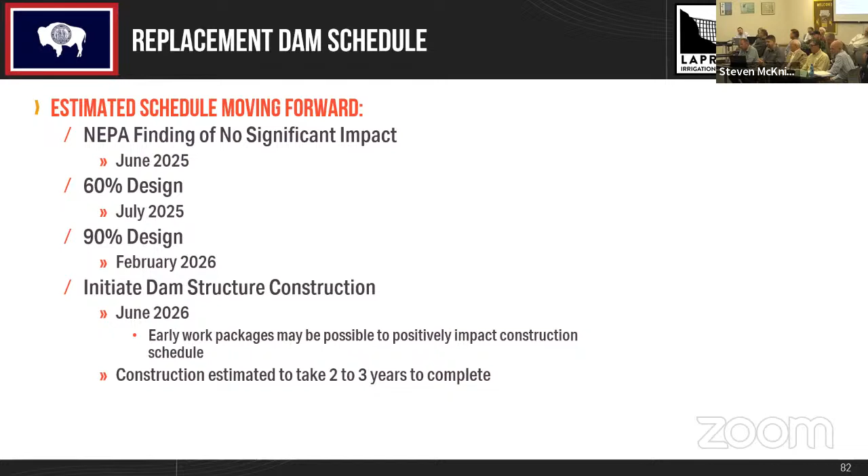Should be happy to take any questions.

Thank you both for that excellent presentation. This has been a struggle. So do I have questions from... Okay.

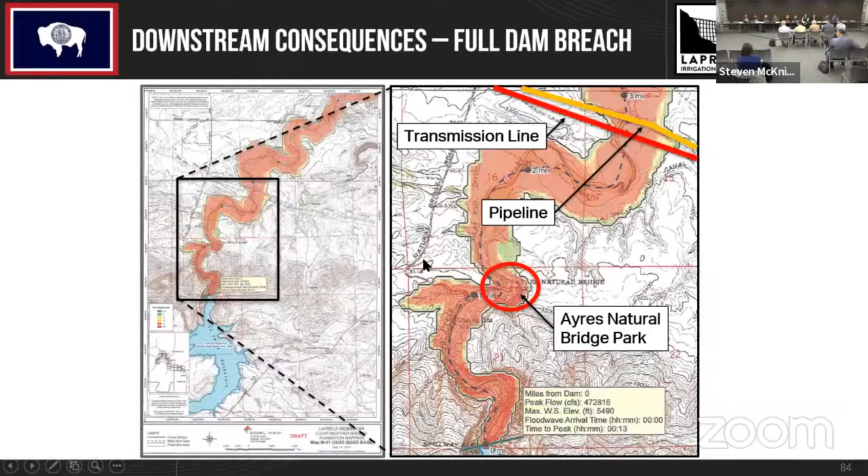Representative Lyman: Thank you, Madam Chairman. One curiosity question as I'm listening to this conversation, what is the need for a buttress dam? I mean, if you're going to go back in there and build the new structure, how can this dam serve to be utilized in that construction process? I mean, I guess what I'm kind of hearing, and maybe you can correct me if I'm wrong, is that we're going to tear it all out and then end up having to go back in and build something to hold back water or control flow as we're building the structure. Are you planning on using part of this dam to work through the process of building the new dam and utilize some of that structure to control flows going forward?

Yeah, Madam Chairman, that was our goal as we worked through the options. That was one of the priorities - was can we leave enough of the existing structure in place to help manage flows for new construction, and ultimately coming to the conclusion that there's nothing with this existing dam, given our timeline, that we could do and leave that option on the table for us with confidence that it wouldn't potentially fail.

And so to your question, ultimately the contractor doing the new dam construction will have to come up with a plan for managing water. Whether they'll be able to use some of this structure or not, I guess I couldn't speak to, but that will have to happen.

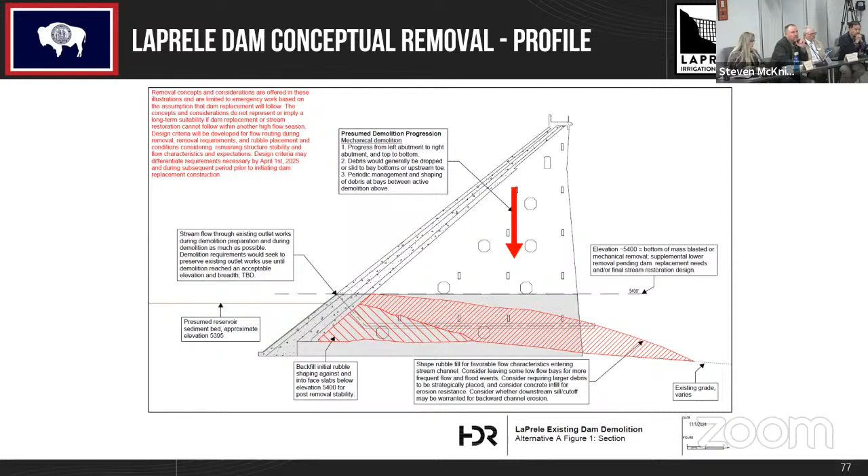I think between the two of us, we can answer that. Some of this is unknown because we never know just how much runoff is going to come down each year, depending on the snowpack, to manage this. So there could be a large volume going down the creek, which could take out infrastructure that's already in place.

The shareholders, we've already started discussions on that. They may have to move back their calving areas. They may have to change some things, it could take out their bridges.

As far as the irrigation season, this could be earlier now. We're going to be seeing discharges maybe April, May. A lot of these larger shareholders with pivots, it's too early to turn them on a lot because they could freeze. Our mains and our laterals could still have ice and snow in them. So this is presenting a challenge.

It's going to have to be a lot of discussions. How are we going to appropriate that runoff through everybody, the smaller shareholders, the larger shareholders? So yes, this is going to be a challenge. I don't know if that's answering your question.

Our shareholders, we had a meeting last night. They're still paying their assessments. We still have expenses, but you can see their frustration. They won't be getting their normal water, they're just not going to be getting that. And what's also happened is you don't miss a good thing till it's gone.

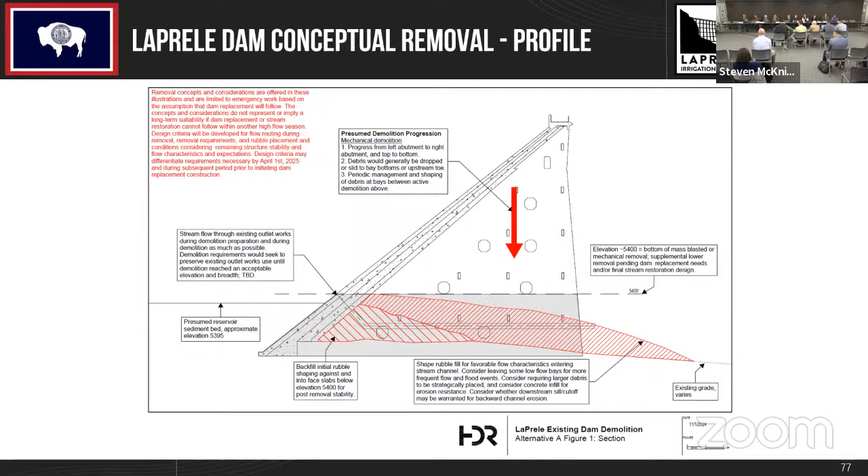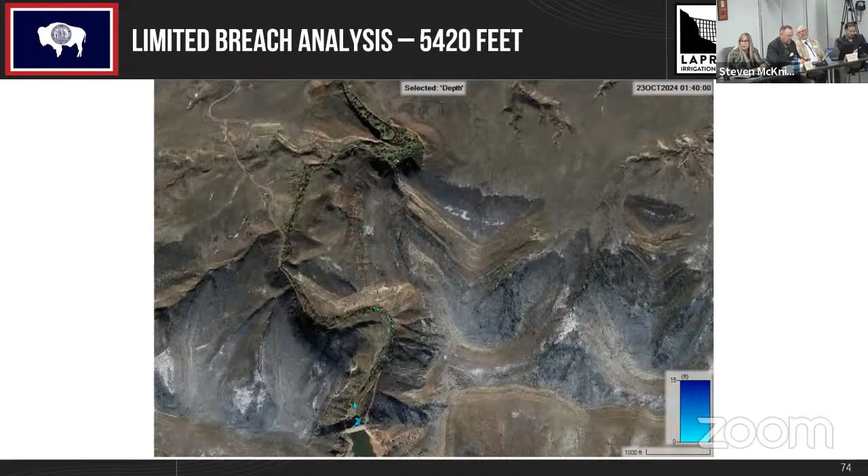Chairman Steinmetz: Thank you, Madam Chairman. I just wanted to go back to that slide that talked about the percentages of the risk of failure, and I wanted to talk through that and what we went past. It was the one before that one when you were backing up. That one. Can you explain that a little better? And also how much flow you're basing your modeling off of, because we're hearing the outlet can't take it, but I just want to know the estimate of how much you're talking about coming in and letting out, and those small percentage numbers—2% chance, 1% chance, 0.2% chance. What are we talking about there?

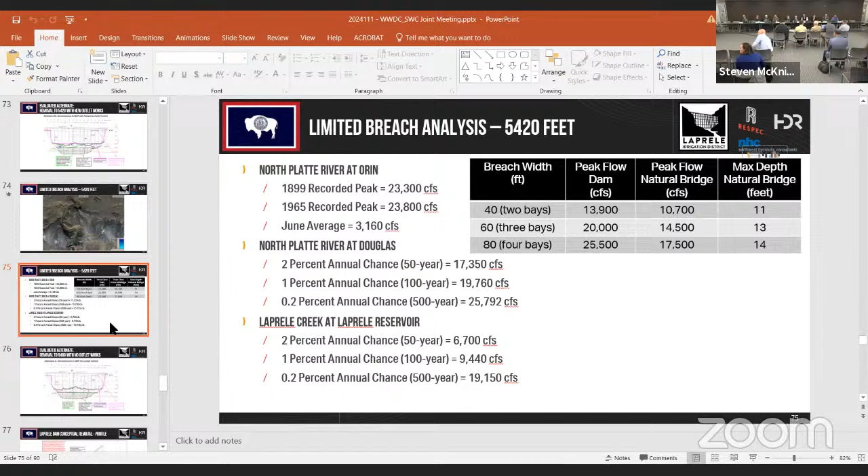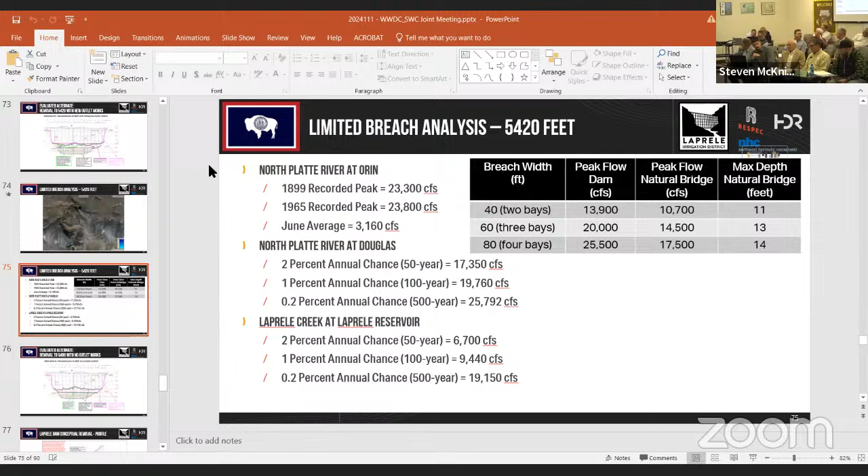Yeah, Madam Chair, Senator, bear with me as I work through your question. So just to consider the dam failure, and those numbers on the upper right—that's really considering events that could come into the dam, exceed what the outlet works could handle, and fill it up. We're only talking up to that 5420 elevation, so only 25 feet of depth in the reservoir. So the analysis of that failure is simply: we've got 500 acre feet of storage behind this structure, and it fails. What's that look like? Using standard modeling to analyze that, that's where we come up with these numbers of the flow that could be expected from that failure.

The middle scenario of the 60-foot gap failure, just as a gut check, looking at the long history of dam failure examples to turn to and learn from—there's a particular failure that happened in 1982 in Rocky Mountain National Park. It was the Lawn Lake Dam that failed up above Estes Park. That dam was holding about 600 acre feet at 26 feet of depth when it failed, and the estimates were right at 20,000 cubic feet per second coming out of that failure. The devastation that caused as it headed towards and through Estes Park is really testament to what we're trying to avoid. These flow values in something like LaPrele Creek are just devastating.

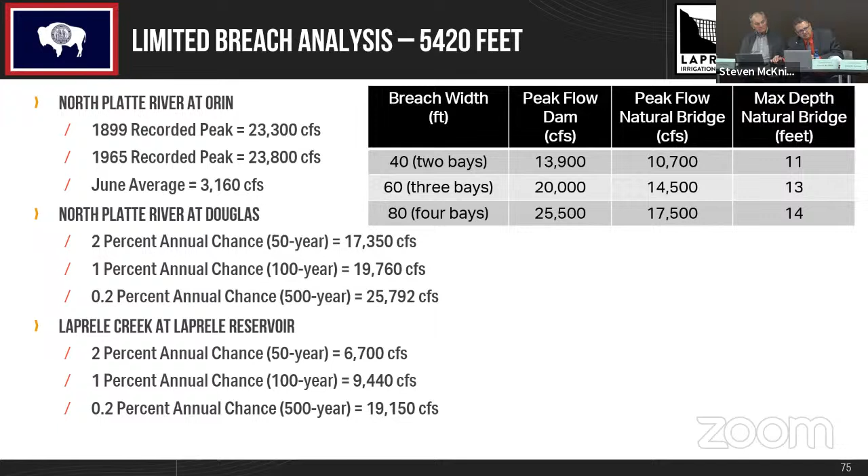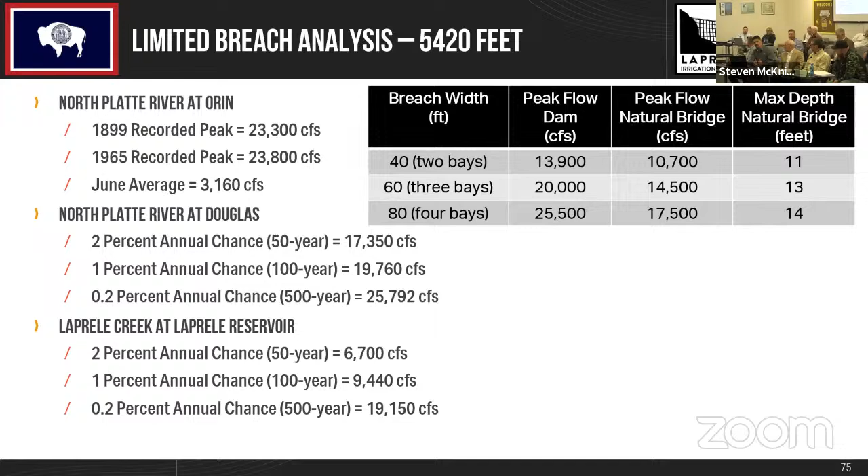Madam Chair, Commissioner, we haven't evaluated that yet. What would be typical for any creek is to have a study done of what a 100-year flood looks like for inundation, and where that gets to. That's a little bit of a question right now. We've kicked this around with the folks involved, and it seems that absolutely needs to be evaluated and communicated.

to folks downstream, regarding road crossings, but also folks and their structures. Talked with some of the irrigators last night, even just helping to make decisions about if they're calving typically on both sides of the creek, they may not be able to do that. So that's something that's in discussion, how do we get that done.

The analysis itself is relatively straightforward, but we also talked with the Converse County Emergency Manager about how this fits in with what may be required from FEMA. They would typically require these studies to be done. But ultimately, where does it fit in the context of this project, and how does it get paid for? How does that get done? That's actively being discussed.

Thank you. I think Gary wants to add something, then I'll come back to you.

As a board, in 2023, I'll have to ask these guys what the actual total flow was, but we actually had to take hourly shifts monitoring the inflows. We were around the clock. It probably would have filled in just a couple days above the restricted level, but to keep it below, we each took hourly shifts watching those levels as they came up, and had a maximum discharge. And as a board, now some of that concrete, when they did core samples, is powder.

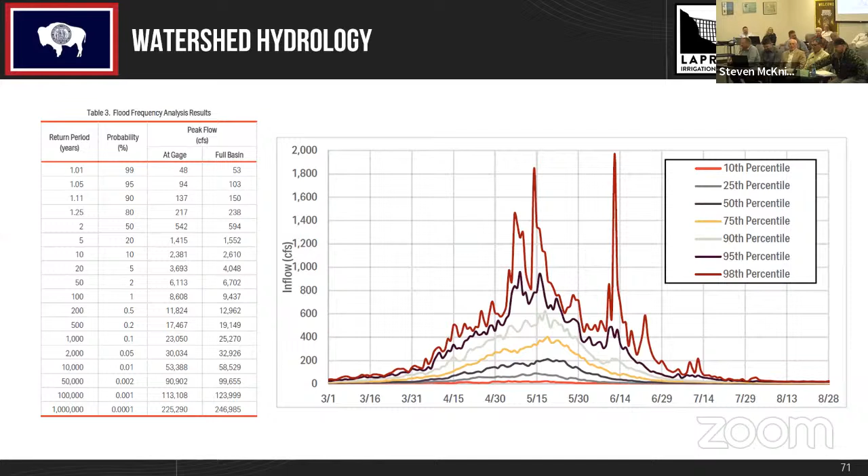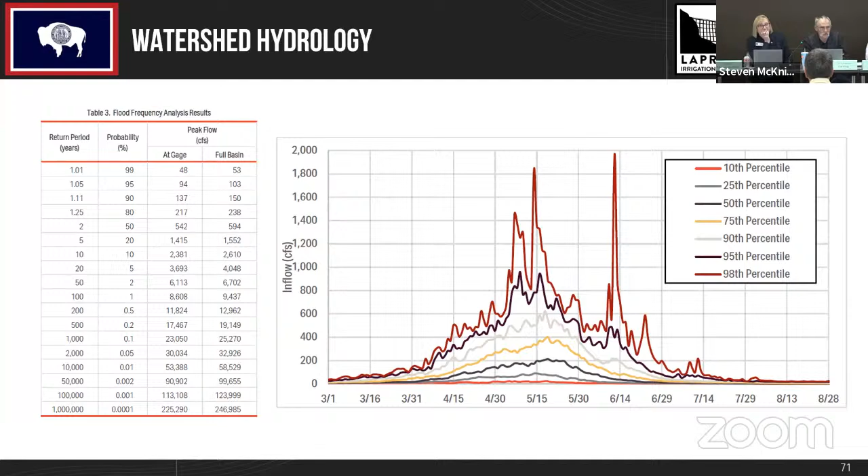Commissioner Craig? Madam Chair, question for the engineers. I saw the timeline. I believe you're talking very soon, trying to let something for bid for demolition. Is that correct? Yeah, slide 81.

Yeah, I can take a stab at that. The schedule up here is just the question that came up when talking to the state engineer's office and others, is this possible? And this schedule was put up there as an example of, yes, we believe it's possible. It is going to be incredibly difficult. With somewhere between a 60 to 90-day construction window, we had to back calculate this. So time is of the essence.

We have to get a contractor on board ASAP. We're actually going to initiate that process, contractor engagement and procurement, to get a contractor on board this week and next week, really to issue an RFP potentially. We haven't really talked through the mechanisms, but it'd be, in my mind, something very similar to a CMAR procurement, where you're doing a value-based selection. We're telling them this is what we want to accomplish.

We have the drawings that lay it out. It's kind of a performance spec: this is what we need the dam to look like after we're done, i.e. everything removed above 5,400. Give us your ideas and proposals of what construction methods you'd use. As Pete alluded to, it could be controlled blasting, blow everything up above that 5,400 level. Maybe it's a wrecking ball, maybe it's cranes, taking it down piece by piece. We don't know that, so we are going to evaluate. I'm hypothesizing now because no decisions have been made. We're trying to figure this out.

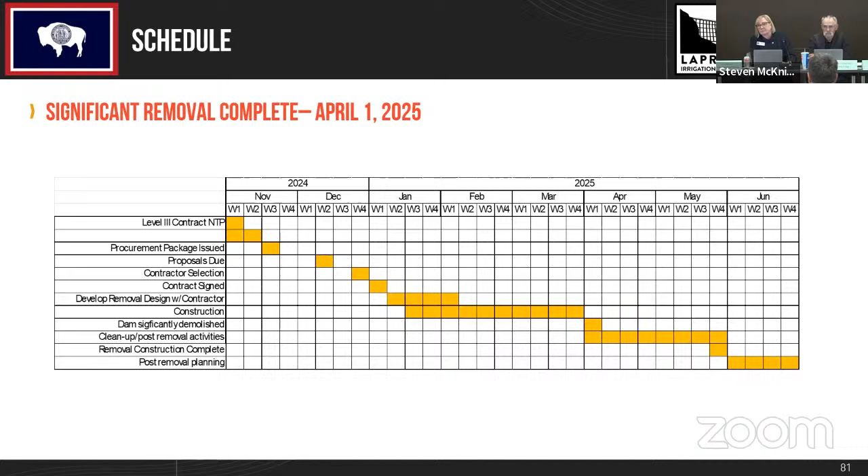Well, we're sorry. We hope, sounds like you guys have a plan of action moving forward, hopefully as quickly as possible. We're just sorry to hear about this because it is devastating. We'd just like to thank all of you for hearing us out. We really do appreciate your time. We do really mean what we say when we say we appreciate your staff as well and everybody else. Like I said, thank you very, very much from our shareholders and us. Thank all of you, appreciate it.

Director Mead? So maybe just one more comment. We've heard the concern about the Douglas well a couple times from the district, so I encourage the district to reach out to the city of Douglas. They're very knowledgeable about their water resources. We've had some initial discussions with them, so we'll encourage you guys to reach out to the city of Douglas on that. And then the other comment I would make is, we've had conversations with a number of state agencies about the situation. So it's kind of an all hands on deck, all of government type solution.

The comment about the interstate, we've had discussions with WYDOT, so they're aware of the situation, and with the Department of Ag, to see if there are any relief type programs. Of course, the permitting agencies as well, so we can keep all that stuff moving very quickly. So we're doing the best we can to make the most of a horrible situation.